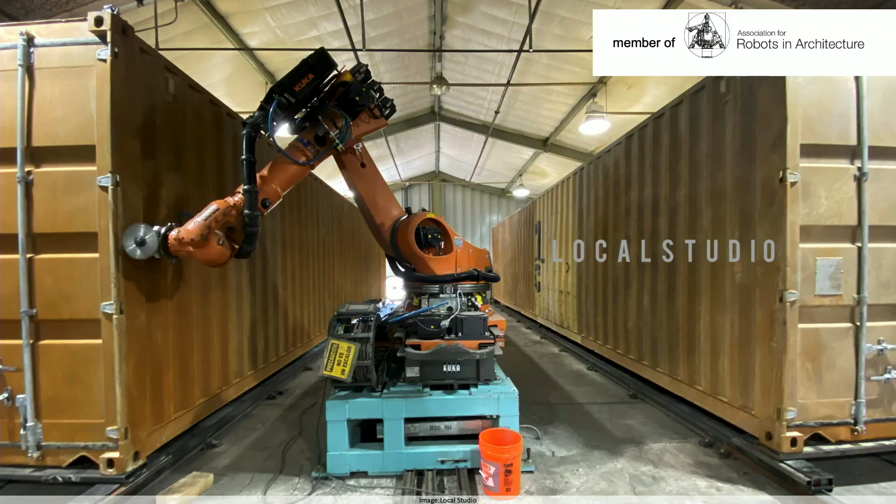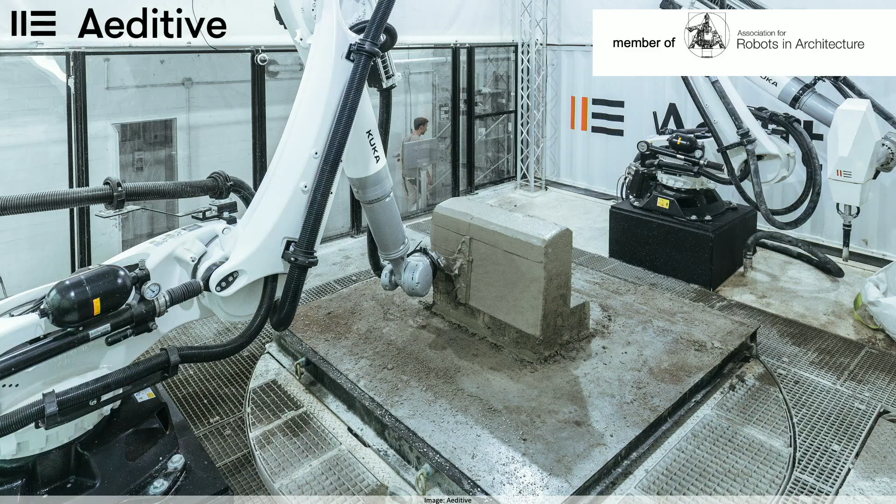So I'm just flicking through a couple of our members. You see they are all in the construction industry branch, technology. We have it also in arts. And a lot of 3D printing companies who are using robots are also using KUKA PRC. And we do have actually also big buildings, like if you go to Germany, one of the biggest railway stations, the scaffolding is done by a robot.

We see that new markets and new ideas and new startups have started in the last years. Just instead of putting a car in the garage, they just start with putting robots in the garage. And this will be hopefully one of the reasons where we can contribute really to the sustainable development goals from the UN in the near future.

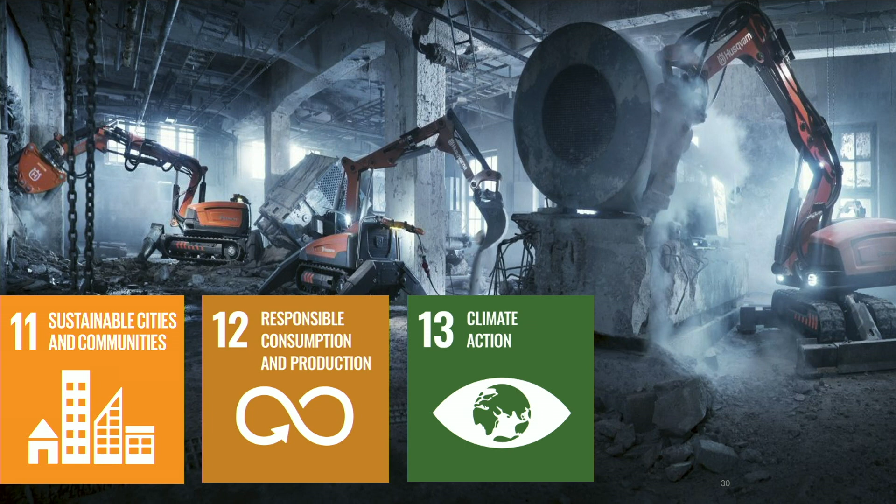From my personal perspective, I think apart from modular prefabrication that we have been seeing, which is very close to car manufacturing, I think on construction site, the first robots will quite soon be installed in demolition. In one of our projects, we have been looking, especially in Europe, we have a lot of existing building stock, and to meet the sustainability goals, we have the 3 R's, which means reduce, recycle, and

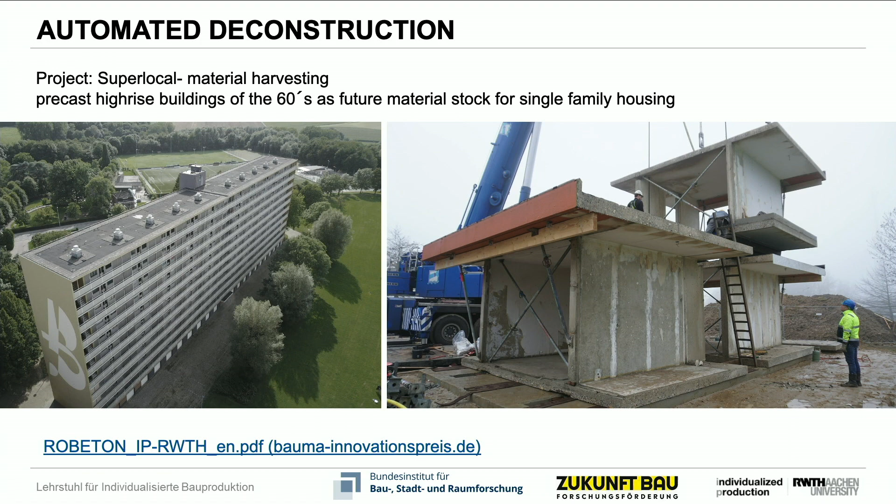just reuse it again. And so we look a lot into how can we actually deconstruct in a controlled way existing building stock so that the material can be used. And this is a project close to the Dutch border, where we actually cut a whole building into big chunks. And the idea was to create family houses out of that.

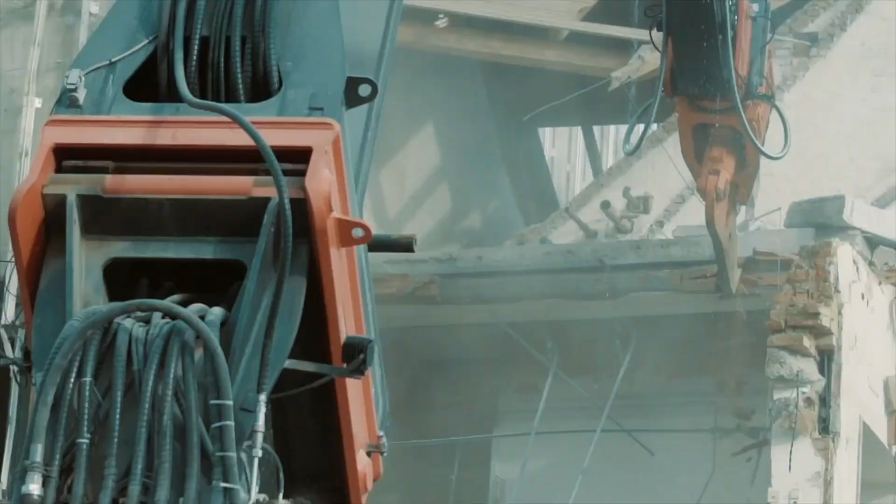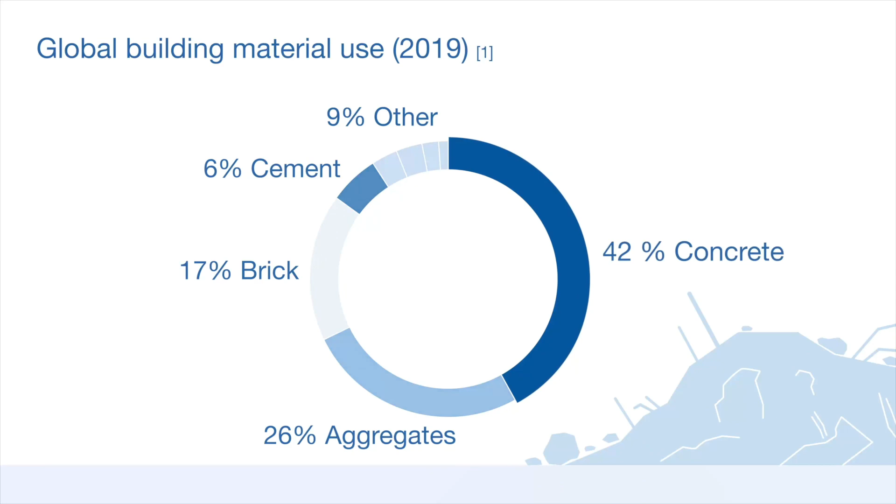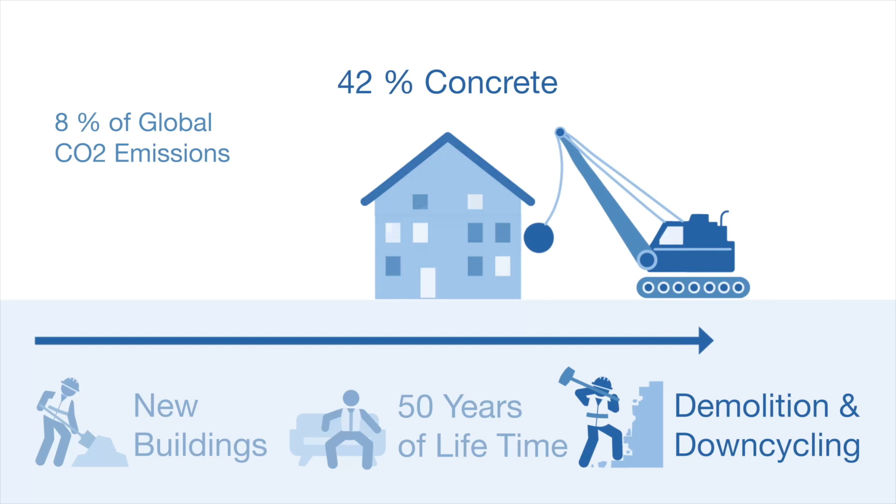Construction is one of the most critical economic sectors for current climate change, accounting for over 39% of global CO2 emissions. Current construction contains over 28 billion tons of concrete. This is 42% of the global building material supply. Cement, which is the basic material of concrete, makes up 8% of global CO2 emissions. 28 billion tons of concrete represents a significant source of secondary building parts for reuse.

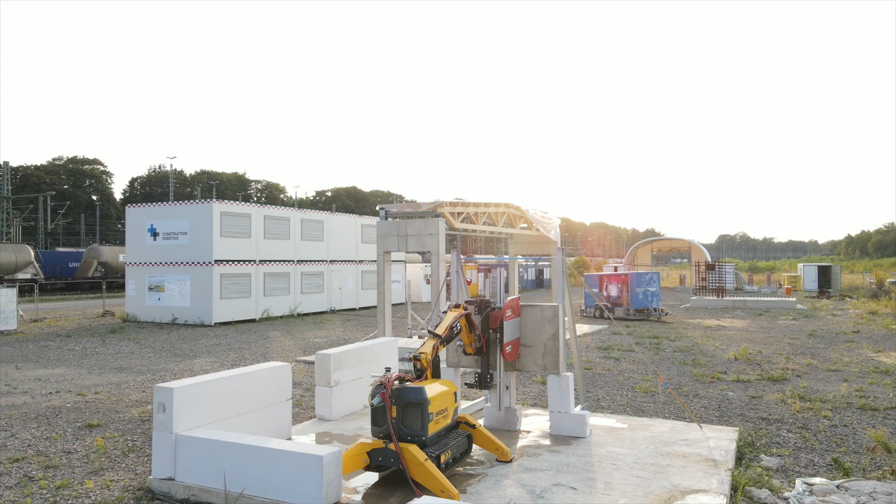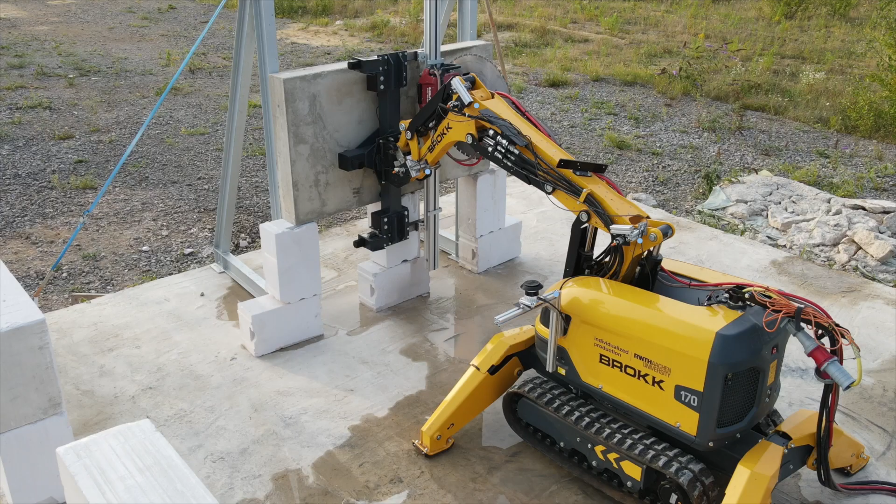An interdisciplinary team at the Chair of Individualized Production at RWTH Aachen University is developing new methods for material harvesting by increasing the levels of automation in the deconstruction process. The ROBETON research project bridges this technological gap by transforming an existing manual demolition machine into an automated deconstruction robot. The hardware of the existing Brokk deconstruction machine is extended by attaching motion sensors for each axis.

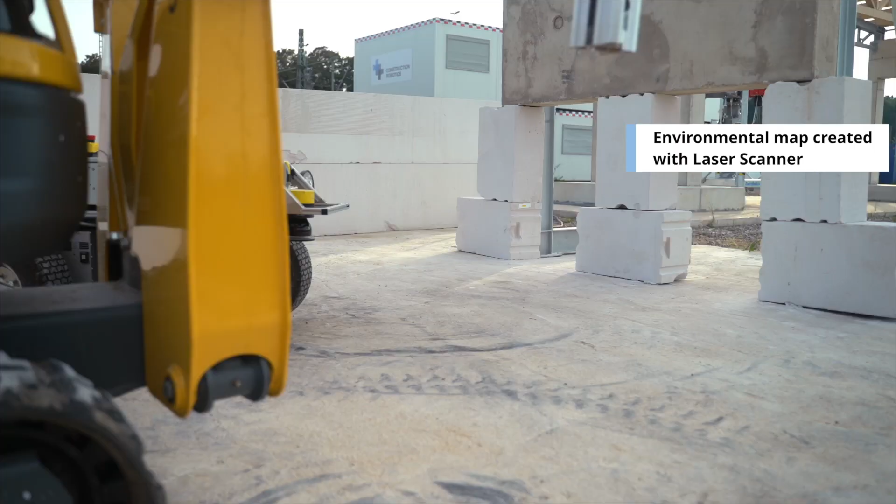The deconstruction robot is supported by a second mobile robot for environment detection and component recognition. A digital twin is connected to the robot control through a newly developed user interface. The ROBETON project researches into precise movements of the automated Brokk joints and Hilti saw. The movements are virtually pre-planned, then adapted to construction site requirements. Concrete is a new source of secondary building material. The aim is to increase the lifetime of existing concrete construction.

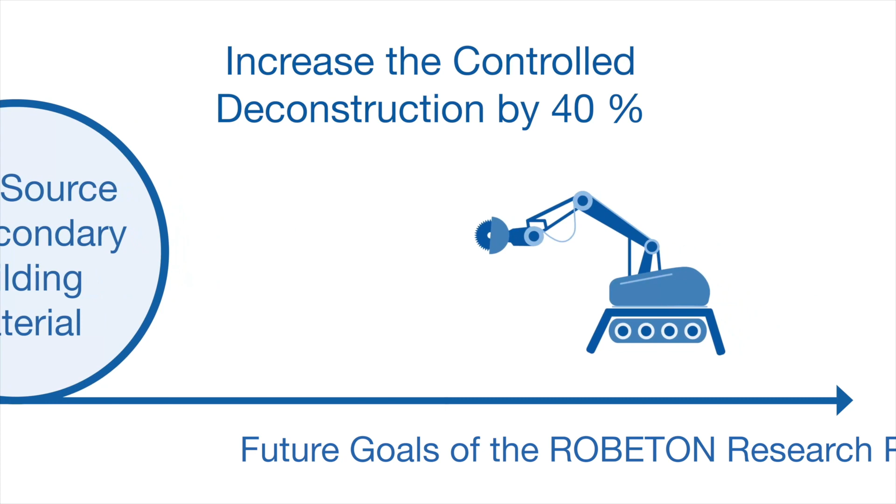The ROBETON Research Project enables automated deconstruction and the creation of new building processes for modular reuse of harvested concrete building parts. The future goals of the ROBETON Research Project: increase the controlled deconstruction by 40%, increase worker safety through automation, reuse 70% of existing concrete building construction for the extraction of secondary building parts, reduce global cement-based CO2 emissions by 1%.

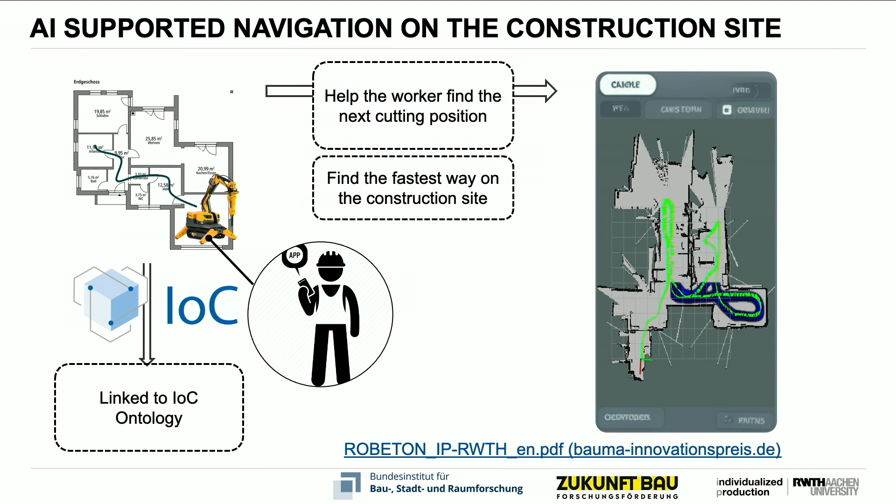So what you saw here is more or less that we, in our research in Aachen, now go beyond the industrial robots. So our next goal is how to robotize construction machinery. Obviously, there is some interesting development to be done now, which is how to navigate on construction sites. And so what was important now is that we realized that only a digital programming software is not enough to really research into the future of construction.

So we actually set up this new construction site that was supported and sponsored by our industry partners when we set up the new Center for Construction Robotics. And what we also realized is that we have great planning tools, we have great digital data platforms, we have great robotics, but when we send information on the construction site, it is prohibited due to the fact that data just does not reach the machines or does not reach an iPad or a server and things like this.

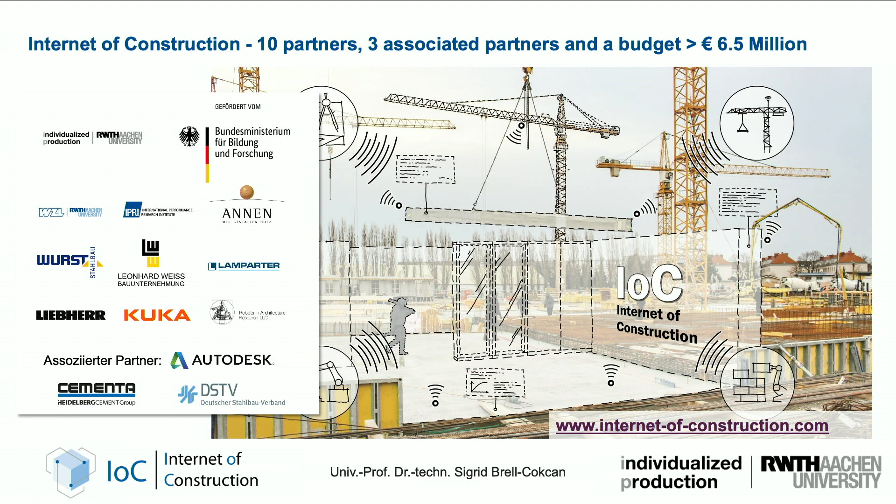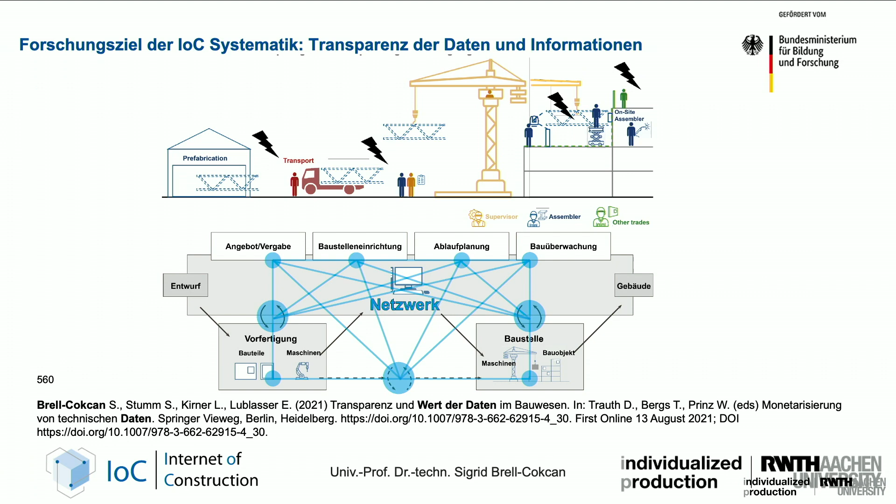So that's why we set up a project which was called Internet of Construction with 10 partners, where we actually built on our reference construction site and wanted to see how is information and transparency, and where are the missing links coming from maybe pre-production or the information coming from planning data to the construction site. And in this project, we also analyzed a lot of the data platforms that our architects and civil engineers are working on, especially IFC data models and BIM models.

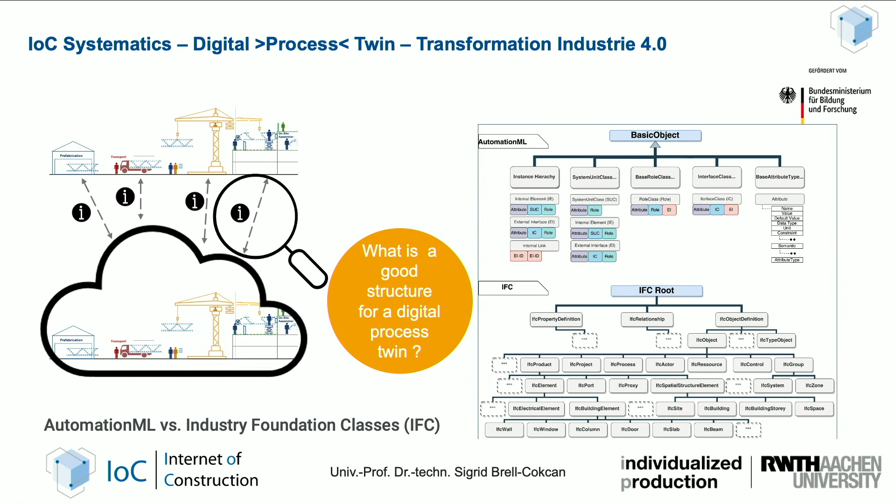And when you compare this, for instance, to AutomationML, you see immediately that the whole hierarchies and structures in IFC files are quite complicated. And AutomationML is quite interesting because you can actually also organize data without actually having a standard, whereas in BIM, we always need to have a standard first, and then we can produce data.

And so technologies that we are looking into very constantly now are, for instance, artificial intelligence and ontology. That's actually also a technology that has existed for a long time, since the 60s, in linked data. And here the great part is that it is actually possible to orchestrate construction along the value chain independent of the level of digitalization. And you can decompose software that we are using in construction. In this project of the Internet of Construction, we actually had to work with 24 softwares and with people. So also people can take a role in the orchestration of information.

And so one of the projects is actually also data capturing.

We also need a little bit of sound here, but I'm talking to that now.

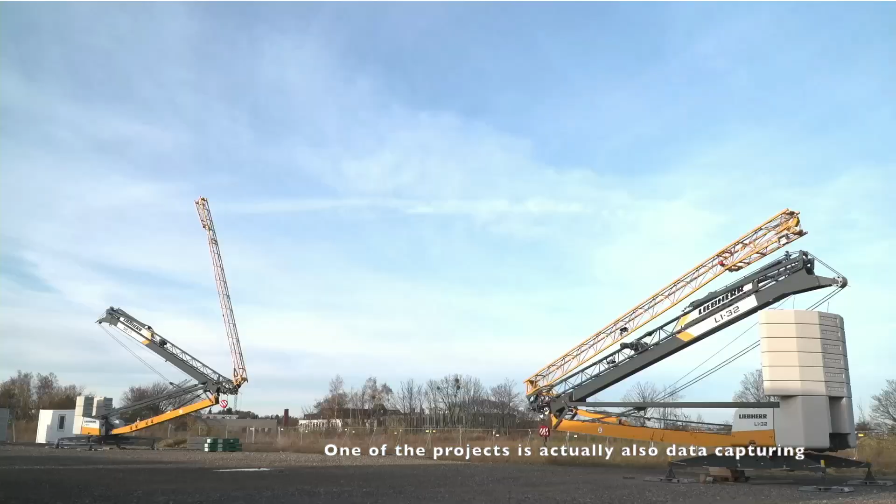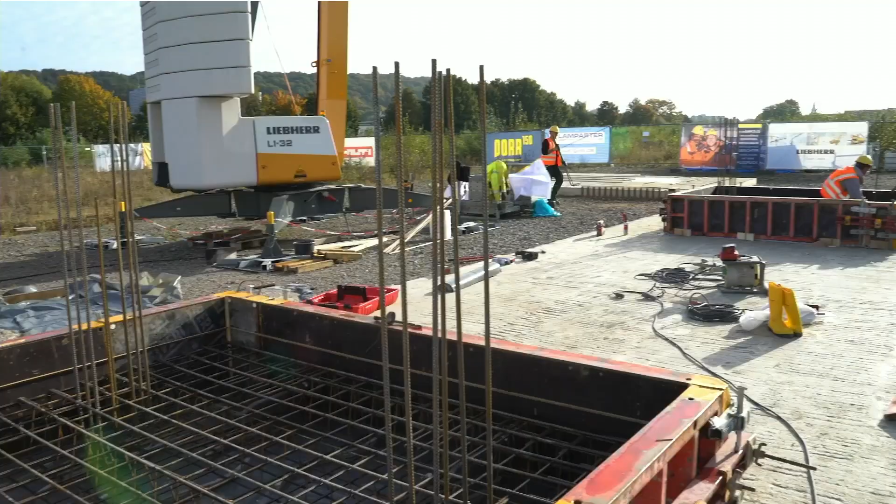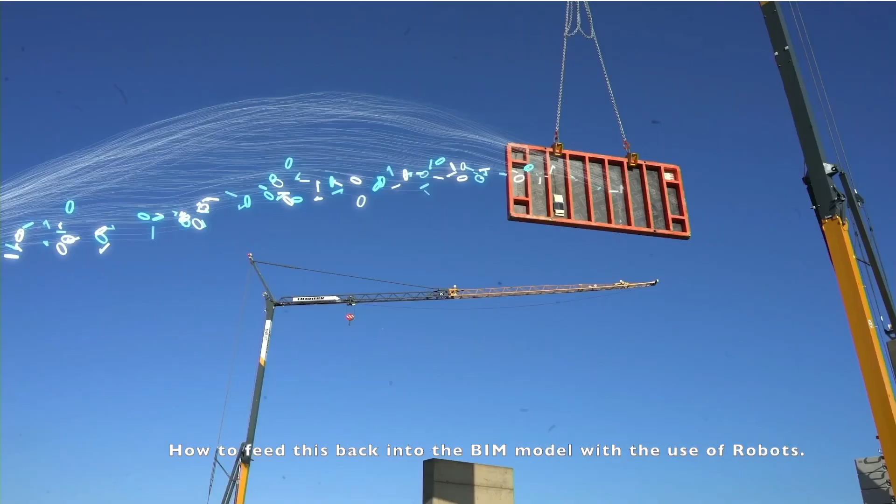And here it is quite interesting with the side of cyber-physical systems and how to actually set up communication networks. And then obviously also how to integrate the normal use of material and information in the construction industry and how to feed this back into a BIM model with the use of robots.

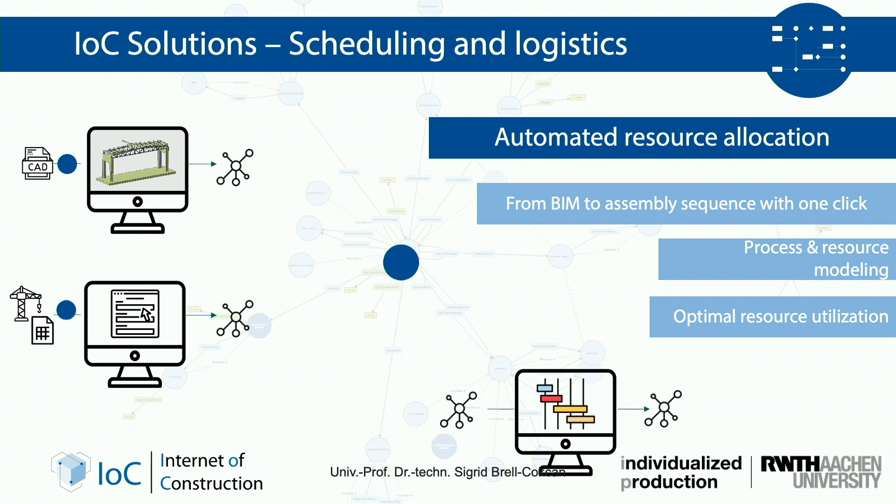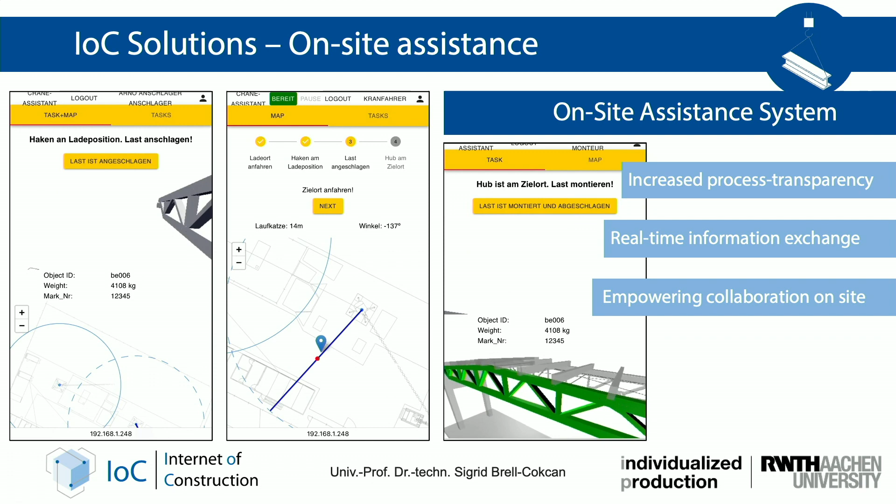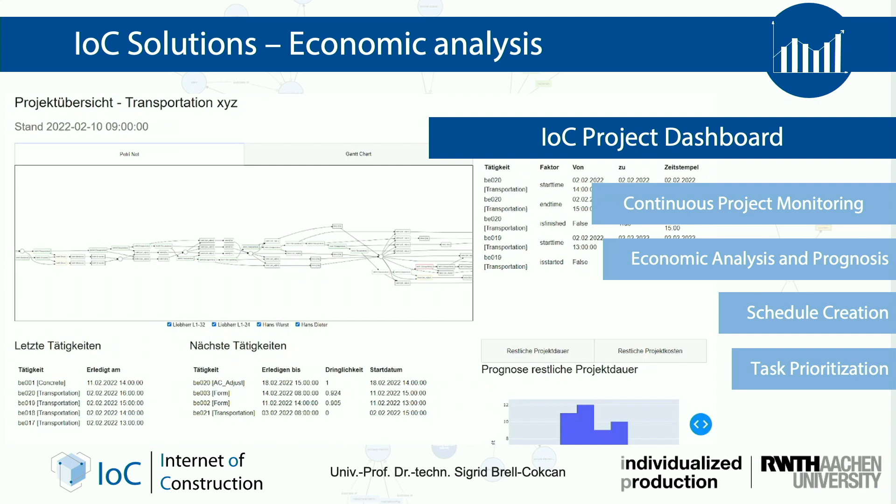Yeah, so we can just click through here. So automated resource allocation is one topic. Then obviously also creating a crane to be a logistic, similar to Amazon, so that the crane can tell you where to locate what building part and what process. So also enabling cranes to be roboticized. And then obviously also having the cost and all the prediction of what is happening in the background, economic analysis.

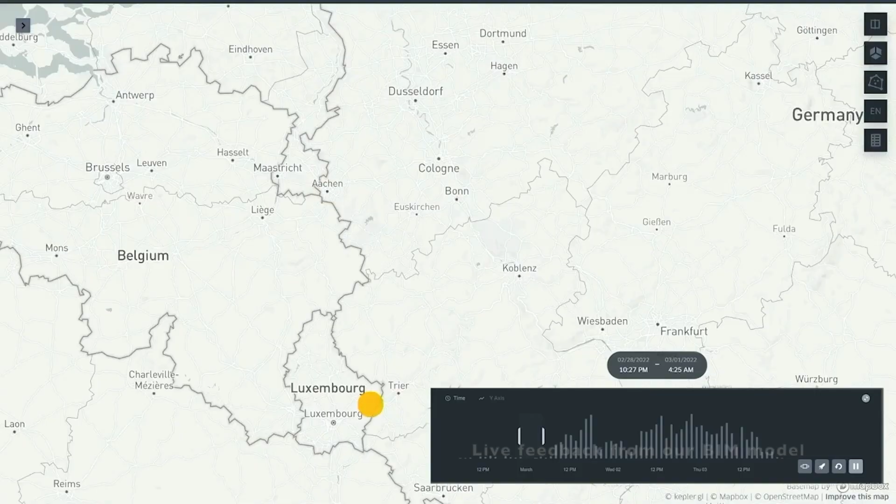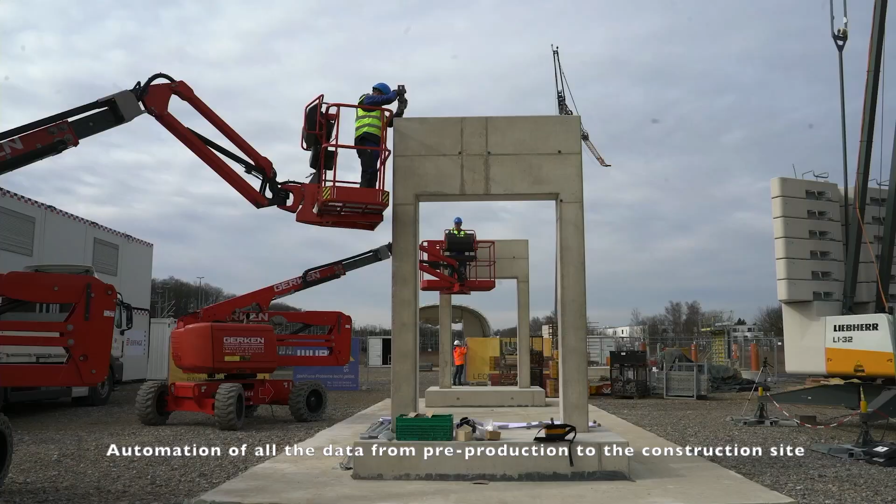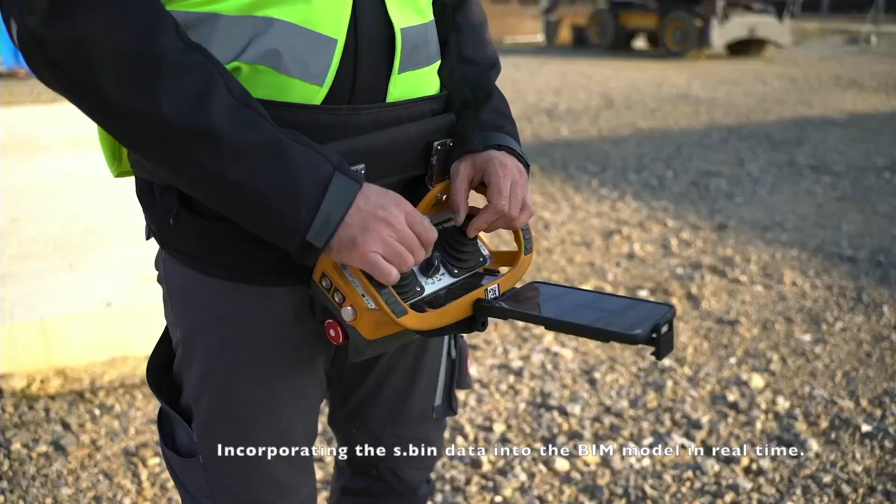So in the end, I can show you what was the output. We had a little demonstrator made from wood, steel, and concrete, where we actually had a live feedback in our BIM model. We looked into the automation of all the data coming from pre-production to the construction site, also by the use of AR technologies for the construction workers to understand what's going on. And then incorporating the as-built data into the BIM model just at the time when it was built in real life.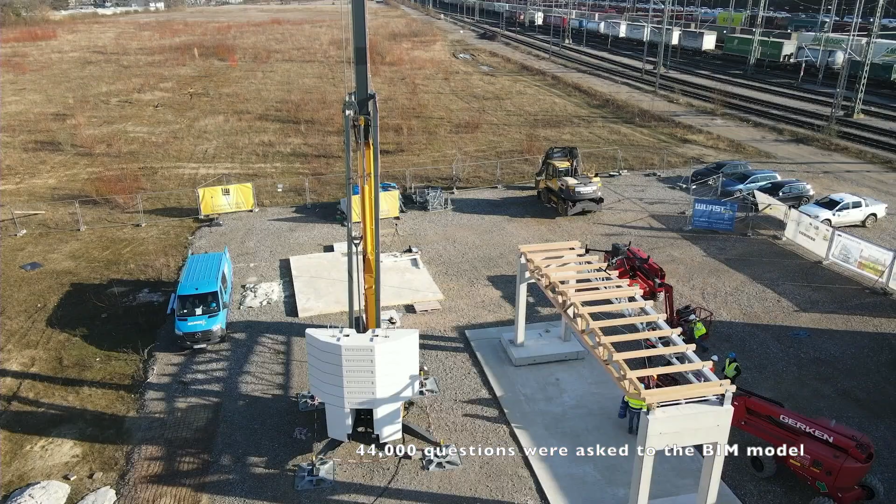And we realized that 44,000 questions were asked to our BIM model, which means that the next generation will be in how to orchestrate this information with other technologies than what are available, like Wi-Fi or whatever. So we are deeply looking now into 5G and how the future of 6G should look like.

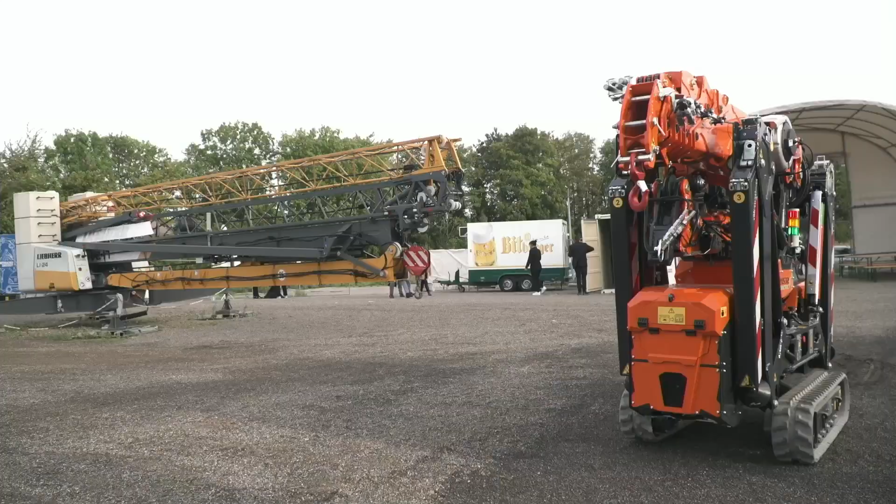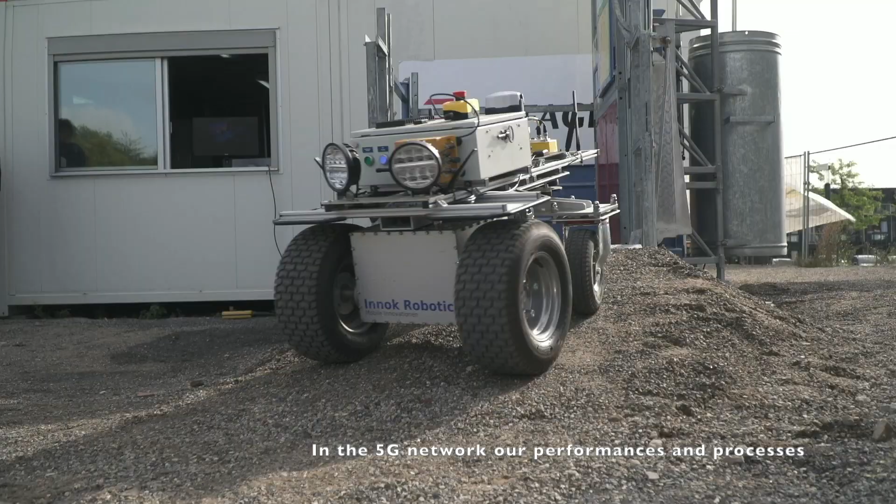We are now part of this 5G Industry Campus Europe in Aachen. So we moved the construction site to a new space where we can now also perform our performances and our processes in the 5G network. So we look into how robots actually work together with elevators or with cranes. We're taking ideas from different industries and integrating them into one process that could add more intelligent automation to construction sites. So our main projects at the moment are working with 5G and with edge computing.

So we are trying to set up a whole networked system on a real construction site, because we just realized that digital platforms are good, but if they can't meet the construction site and serve workers on the construction sites, we still have a problem. And at the moment, maybe about 10% of data are reaching the construction site. So they're still working with plans and whatever. So that is the goal that we would like to pursue in the next years.